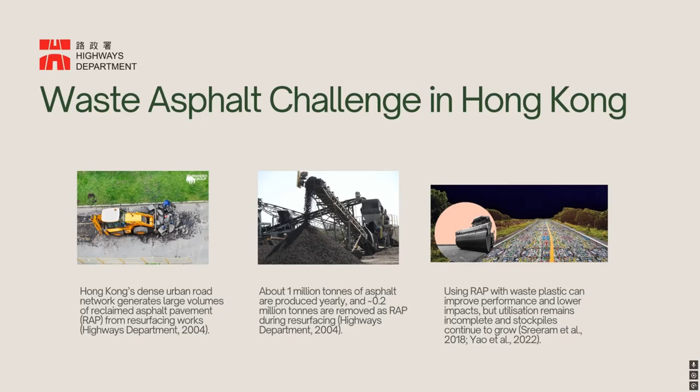Our topic today is waste to fuel in the Highways Department, and I will briefly explain the waste asphalt challenge in Hong Kong, its environmental risks, and how we use a more sustainable way to treat it. Hong Kong's road network needs frequent resurfacing, which produces reclaimed asphalt pavement. The Highways Department reports about 1 million tons of asphalt and 200,000 tons removed each year, so substantial RAP stockpiles remain. But unmanaged RAP is not harmless.

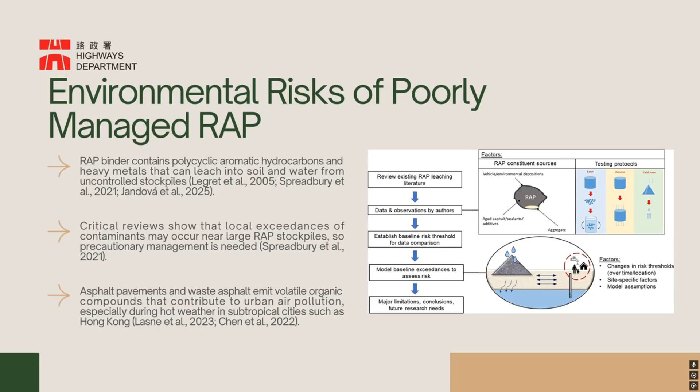Research shows that aged asphalt can leach heavy metals and PAHs into soil and water, and that RAP stockpiles and pavements emit volatile organic compounds that add to air pollution in hot weather. So our project proposes a waste-to-fuel pathway that treats RAP as a secondary petroleum resource. Through pyrolysis, we convert the aged binder into liquid fuel and char, so we can cut waste, relieve landfill pressure, reduce greenhouse gas emissions, and create a higher value outlet for RAP.

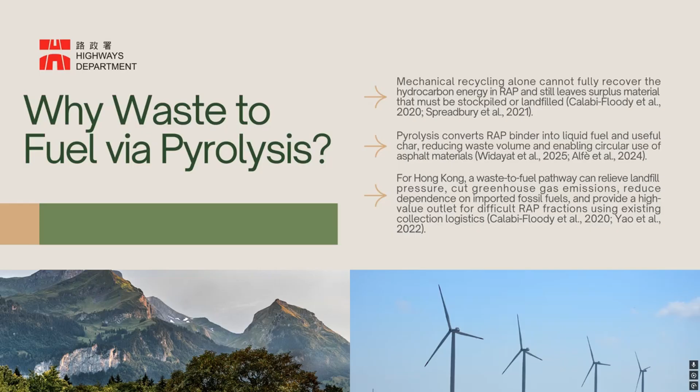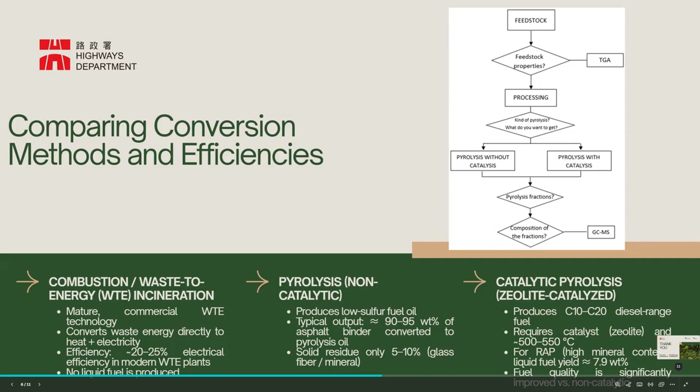So let's move on to comparing the conversion methods and their efficiency. There are three conversion routes for asphalt waste. First is combustion: commercially mature, 20 to 25% electricity efficiency, no liquid fuel. The second is non-catalytic pyrolysis, which gives 90 to 95% low sulfur fuel oil from asphalt-rich feed. And the third is catalytic pyrolysis, which gives better diesel quality, but on mineral-rich RAP, liquid yield is only 7.9%, still at the pilot stage. Waste shingles reach 95% fuel oil via the non-catalytic route, which is the highest conversion today.

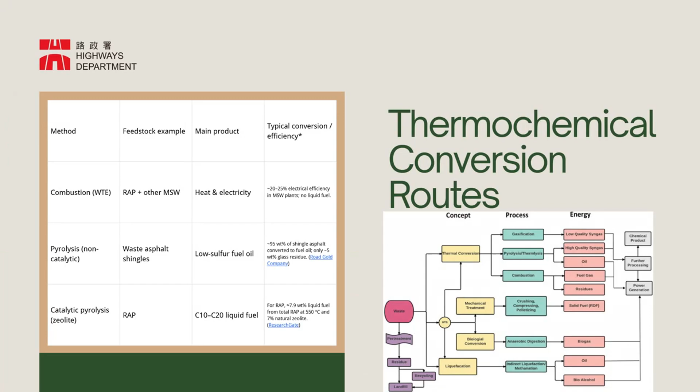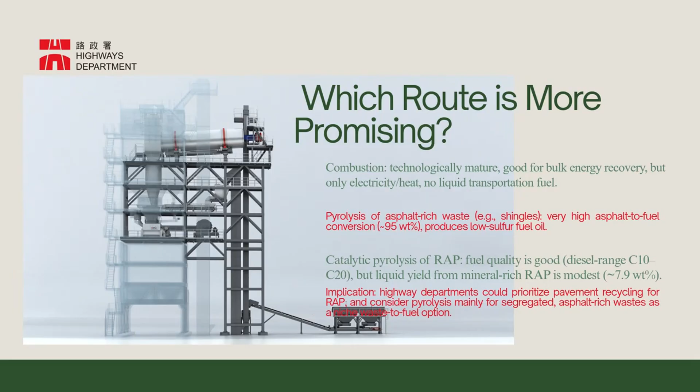So the conclusion for the highway agencies is to continue recycling RAP into new pavement. For real waste-to-fuel, use asphalt-rich waste like shingles, and use non-catalytic pyrolysis, which is the only mature and high-yield path to liquid transportation fuel.

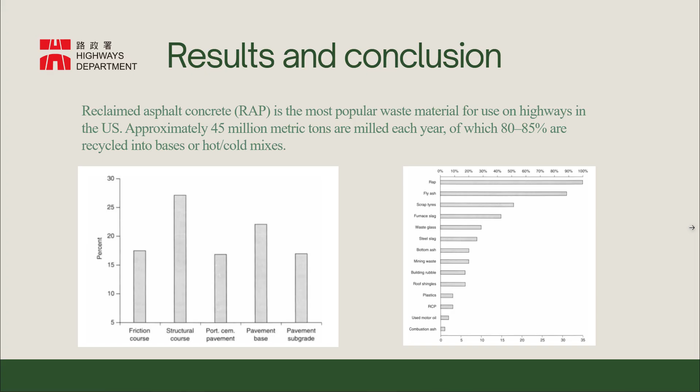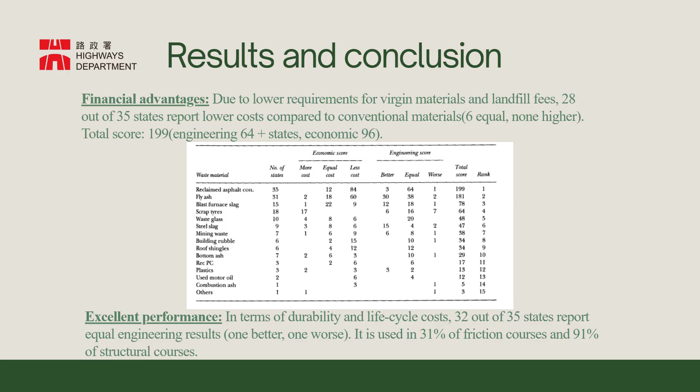And obviously, it is going to be very low cost due to the lower requirement of virgin material and landfill fees. On the other hand, in terms of durability and life cycle costs, RAP is important for engineering as well. As you can see from the table below, RAP ranks top for both economics and engineering scores. The Highways Department sees RAP as a secondary resource and integrates up to 50% into asphalt mixtures. On top of what I mentioned on the last pages regarding cost, the expense can be reduced by 35%, and greenhouse gas emissions can also be reduced by 25 to 30%.

And yet this advantage only applies to the surface course due to stiffness loss and cracking. And the problem of concern by far is soil contamination by heavy metal leakage. And now I will hand it over to Joe for part 2 of the discussion.

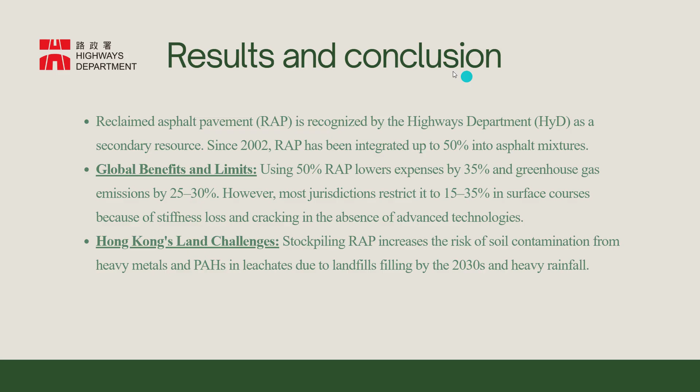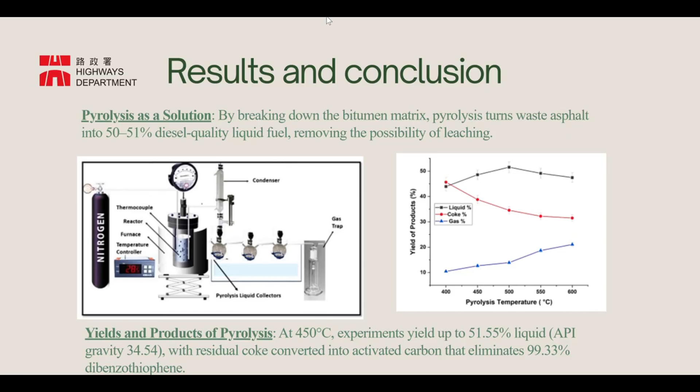Thank you, John. To solve the problems caused by RAP, we can use pyrolysis as a solution. Pyrolysis can turn the waste asphalt into about 51% diesel quality liquid fuel and remove the possibility of leaching of heavy metals. At 450 degrees Celsius, pyrolysis yields up to 52% liquid fuel with residual coke. Therefore, the Highways Department can break even by selling 2 useful products. Besides breaking even, we can reduce the cost of pyrolysis by using a low-cost catalyst. The low-cost catalyst can produce about 51% liquid fuel, comparable to using an expensive catalyst.

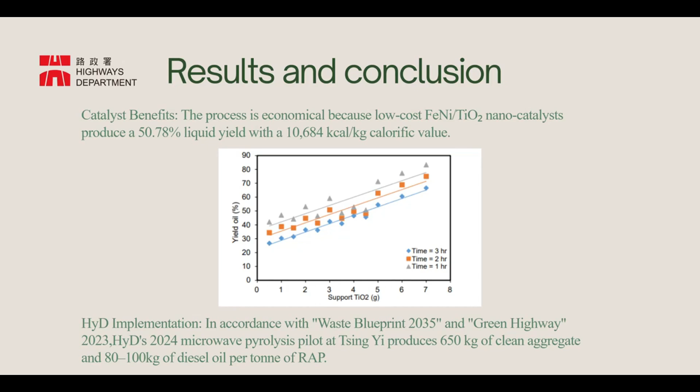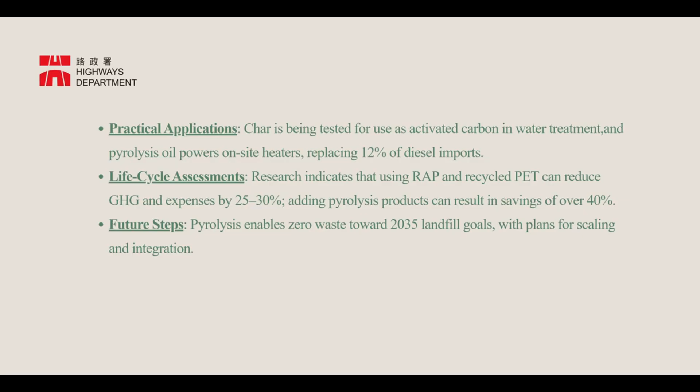In practice, the Highways Department is implementing several plans to carry out pyrolysis in our city, such as the Waste Blueprint 2035. In practice, char is being tested for use as activated carbon in water treatment. Besides, many researchers indicate that using RAP and recycled PET can reduce expenses by 25 to 30%. In the future, pyrolysis enables zero waste towards the 2035 landfill goals, and therefore more pyrolysis will be used in the future.

Hello everyone, I'm Zhang Xiaotian. Here is a summary of our Highways Department's research on waste-to-fuel conversion. To transform reclaimed asphalt into a valuable resource, we propose an innovative strategy, adopting new thermochemical conversion technology to efficiently break it down into clean diesel and high-value activated carbon, truly turning waste into fuel. The successful pilot at Tsing Yi Depot has confirmed its feasibility.

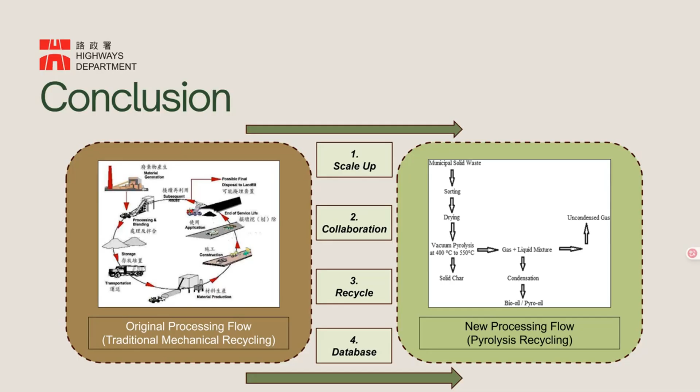To achieve the 2035 zero landfill goal, we recommend, firstly, scaling up pyrolysis with regional facilities. Secondly, enhancing interdepartmental collaboration for better supply chains. Thirdly, promoting the use of byproducts in road construction. Finally, establishing a local database for accurate benefit assessment. Let's move beyond traditional recycling toward fuel recovery and position Hong Kong's roads as a model of circular low-carbon development.